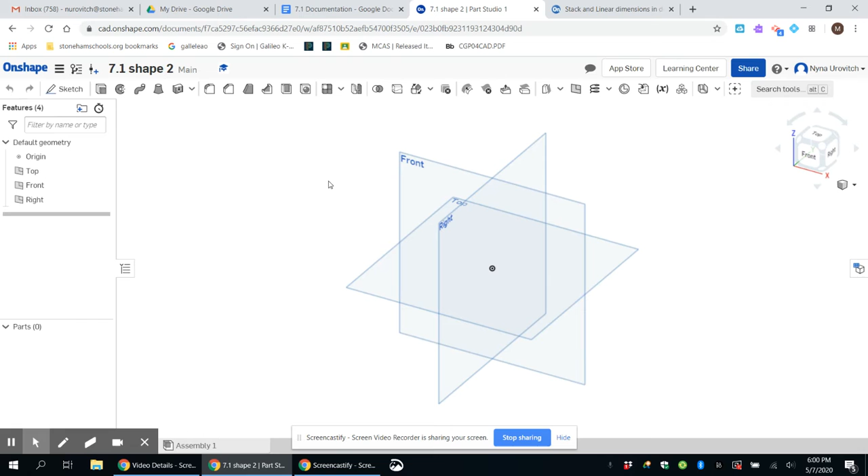And we're going to be doing chain dimensioning, and it's called unidirectional dimensioning. Chain dimensioning is we go from point to point, we put in all the measurements, and unidirectional, we read everything horizontally. Like in our last shape, we're going to start off with the front drawing. I'm going to select front. I'm going to do sketch, I have to select the line draw, and I'm going to create something that is similar to the shape, not exactly, and then I like to dimension it at the end.

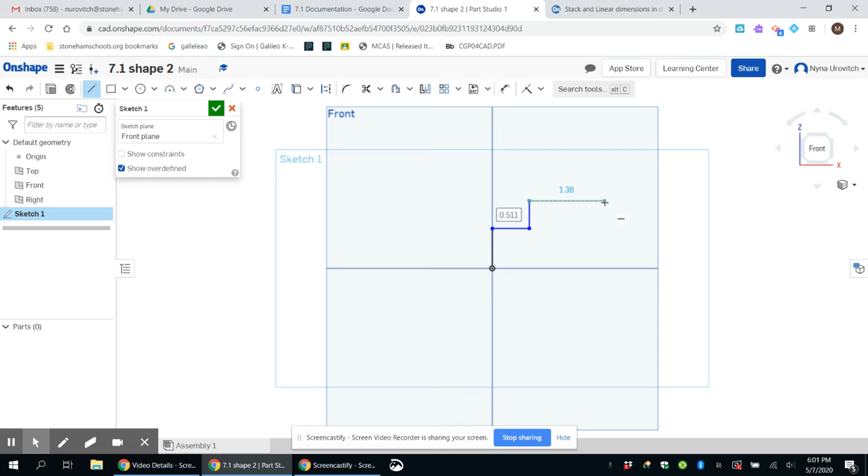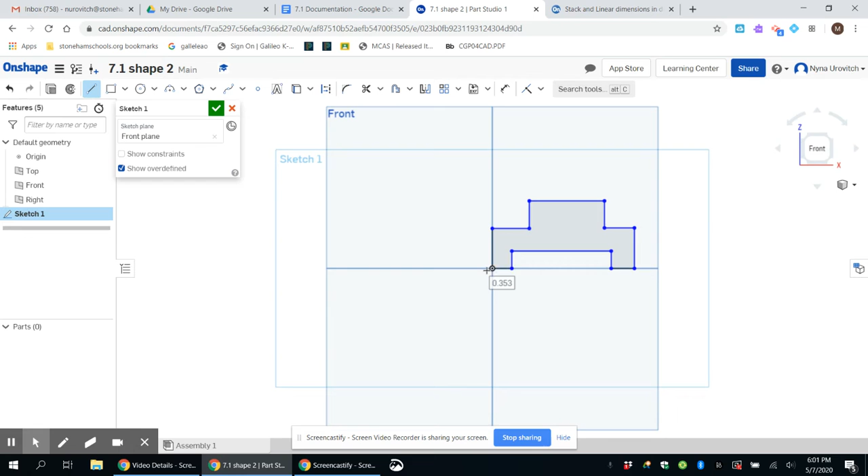There's nothing really to say here. I'm just trying to keep everything perpendicular on the horizontal and the vertical axes, and you can see the black lines show me that. And I'm going to go escape to get out of the function, and now I'm going to start dimensioning. This is the dimension icon. I'm going to select it, and I know the inside is 0.2. I don't want that. It does tell me that it's 90 degrees, so I think I'll just do the outside. I'll start over here.

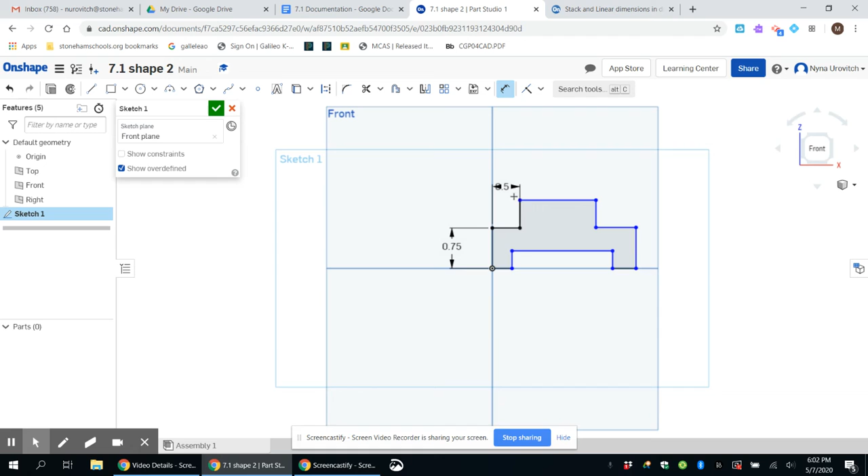It is 0.75 inches. That was a pretty good estimate. This is 0.5. As long as I'm in the function, I don't have to reselect. 0.5 inches. Enter. Don't forget to go enter, and it should adjust it. 1, 2, 3, 4. This is 1 inch across the top. 1 inch. I'm going to go enter. Ooh, it just shows it was 1.

And let me do this one over here. This is 0.5. 0.5 inches.

Whoops, my phone is ringing.

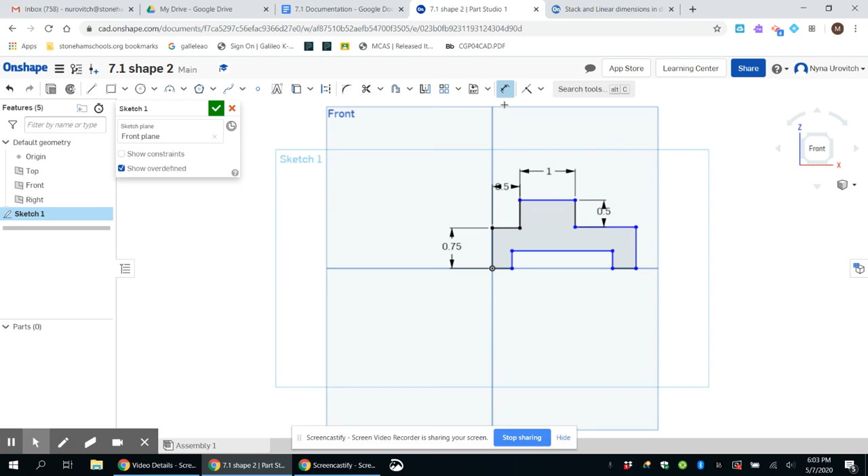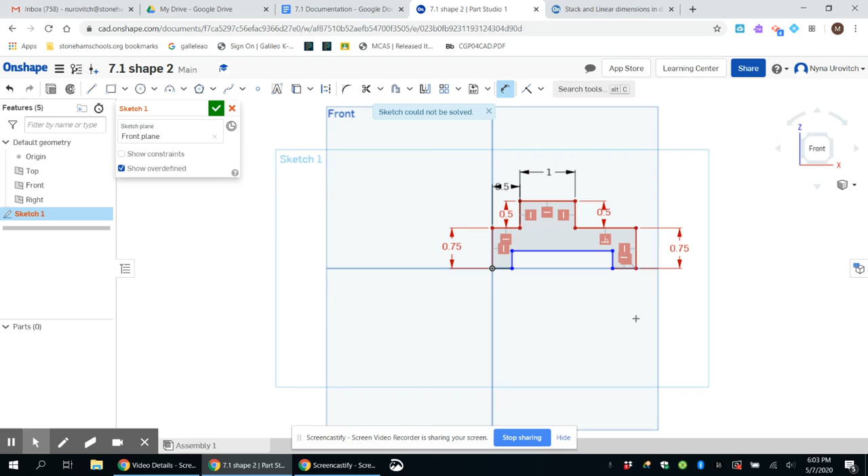Okay, here I go, 0.5. And let's do 0.75, 0.5 for the other side. There probably is a constraint, but I don't know it. So let me go 0.5. Okay. We're just doing very basic shapes right now. 0.75 inches. And that did not work out. Where is my mistake? Let me go back. Go back one more. And 0.5, 0.75.

Let me dimension here. This should be 0.5. And across the bottom is 1.5. There we go. This piece over here is 0.25. I'm going to go from here to here is 0.25.

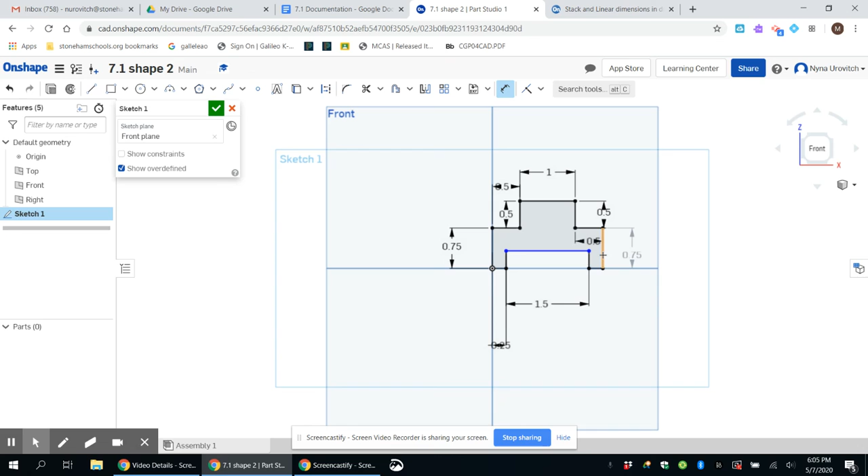And everything looks like it's dimensioned. So let's just double check. There's 2 dimensions that I didn't do. Let me double check that they're correct. I did not do this one. So what is it? It's 0.75, which is what I wanted it to be. And I did not do the inside dimension. I did not do this one. That's 0.25, exactly what I wanted it to be.

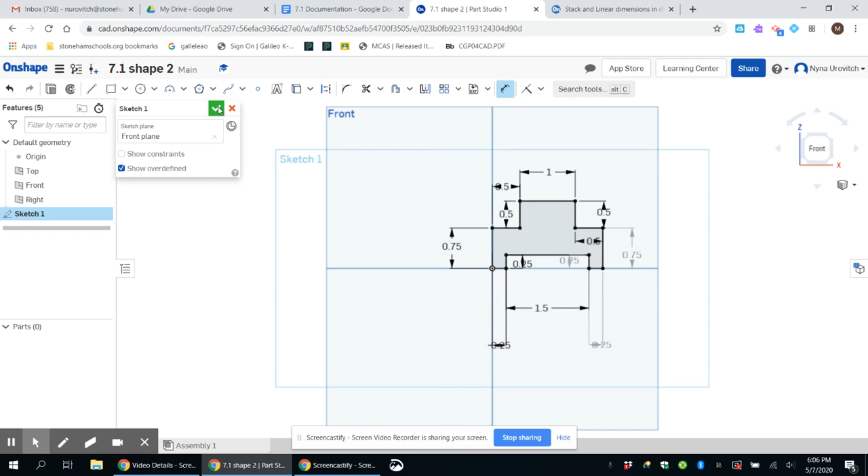And I did not do these inside dimensions, so let me do this one and that one. It is 0.25 as well, so let me get those. 0.25 inches and it is 0.25 inches also. All right, so now everything looks like it's perfectly dimensioned. I'm calling it sketch 1, and I'm gonna go accept it, and we are now ready to extrude.

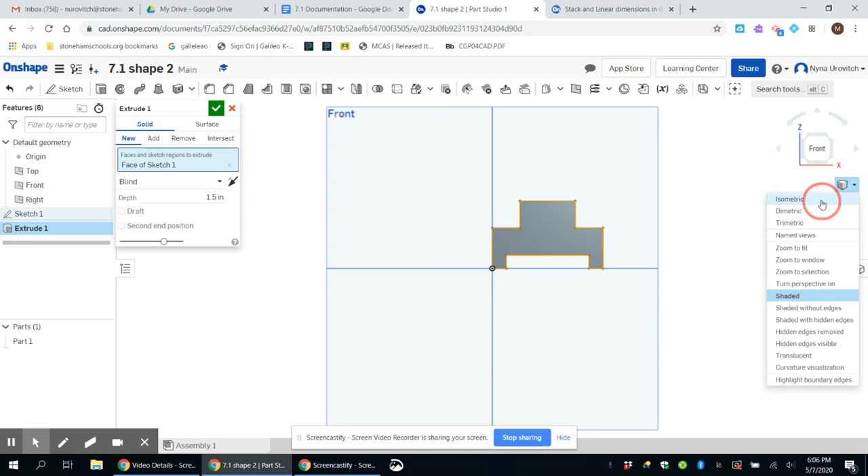It is 1, 2, 3, 4, 5, 1.5 inches thick. So when I go extrude, I'm selecting it. I want it to be 1.5 inches. Go enter. And it has been extruded, but we cannot see that it's been extruded. So I always like to look at it. Let me see the isometric view. And it looks perfect. Okay, so we just created the part and now we're ready to create the drawing.